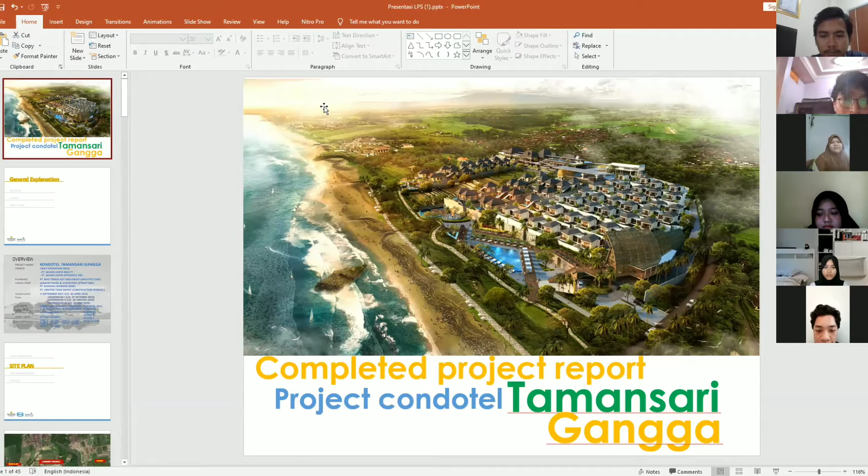Okay, Mrs. Arifiandani, this is our project report. The project is Tamansari Gangga. The overview name of the project is Condotel Tamansari Gangga, and the owner is a joint operation between PT Wijaya Karya Realty with PT Wijaya Karya Persero Tbk.

The planning consultant is PT Bias Tekno-Art Kreasindo as architecture consultant, Junaedi Masil and Associates as structure consultant, PT Narama Mandiri as MEP Mechanical Electrical Plumbing consultant, and PT Arkitek Team Empat as construction management. The construction time started on 9 September 2017.

Until 30 April 2019. First addendum until 27 October 2019, second addendum until 30 January 2020, and third addendum until 30 June 2020. The location is on Street Yeh Gangga, Sudimara, Tabanan, Bali, and the land area is 13,098.125 square meters with 5 floor levels.

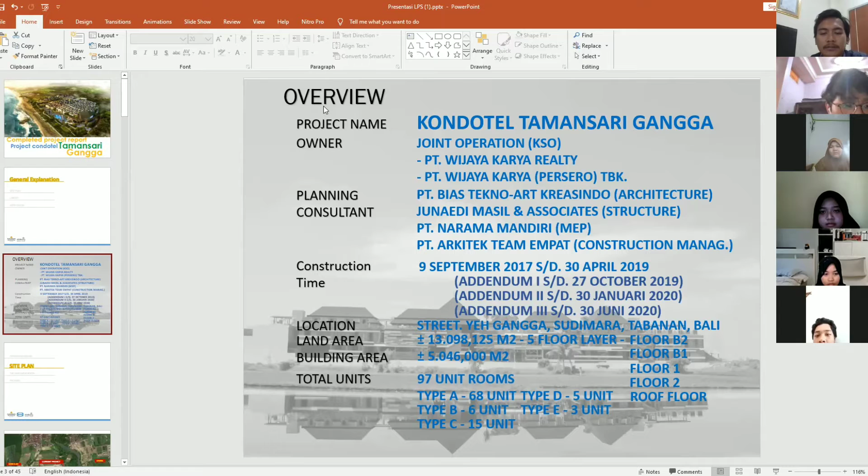Type C: 15 units. Type D: 5 units. Type E: 3 units. Next, the site plan.

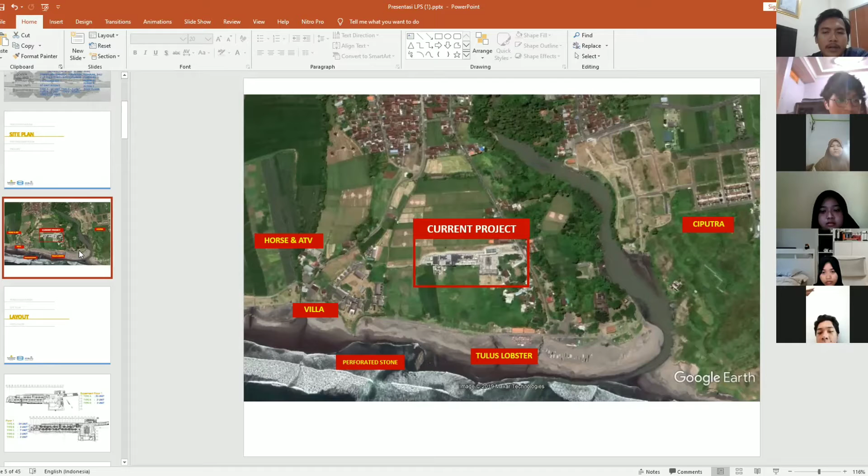This is the site plan of our project. The location is not far from Yeh Gangga Beach. This location is very strategic for the hospitality business in future development. Our plan is to create a beach club at the beach.

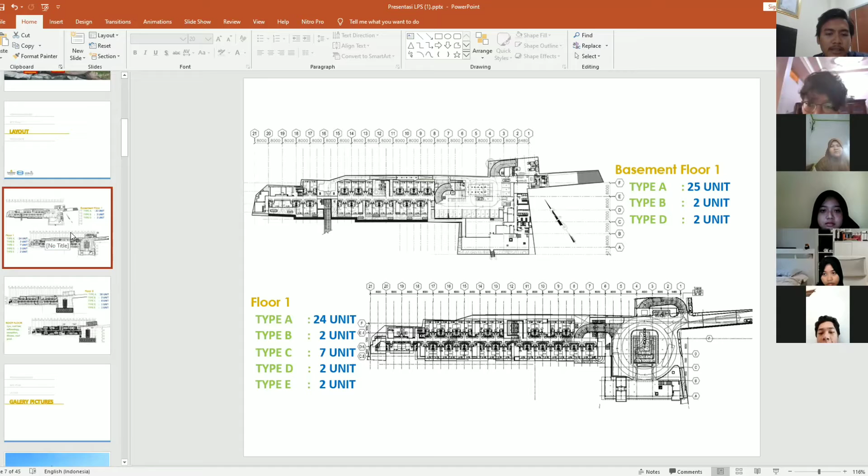This is our layout. There are 5 floors in this building. On basement floor 1, there are 25 units type A, 2 units type B, and 2 units type D. On the first floor, there are 24 units type A, 2 units type B, 7 units type C, 2 units type D, and 2 units type E.

On the second floor, there are 20 units type A, 2 units type B, 8 units type C, 1 unit type D, and 1 unit type E. On the rooftop floor, there is only public area, no rooms.

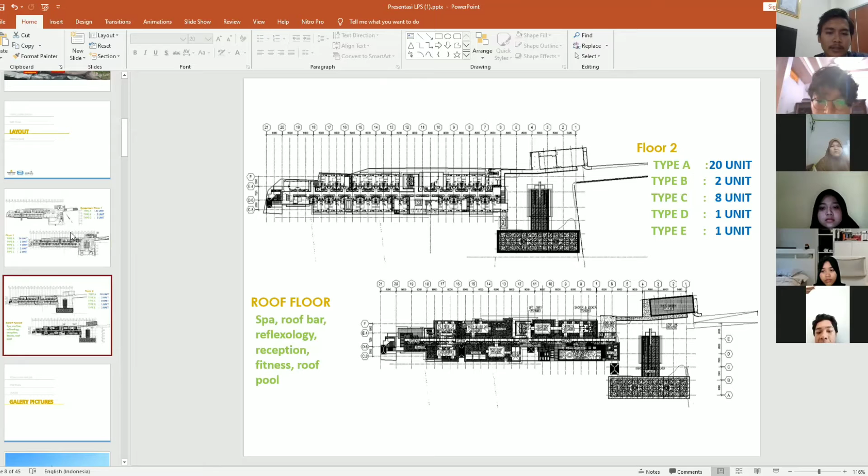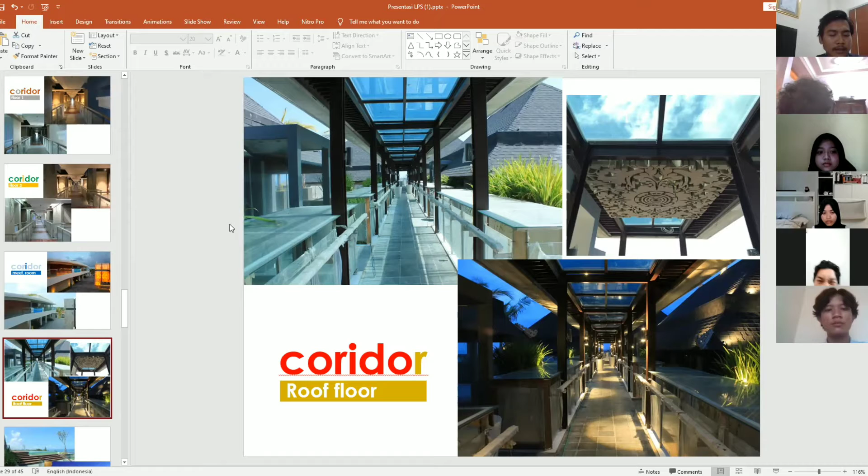Next, corridor. And this is our rooftop. These are the only public facilities, including spa rooms, reflexology, bar, retail, fitness, and pool. There is no room on the rooftop. This is a swimming pool, and this is a great point of view in this building—you can see the ocean. This is the roof bar, where visitors can feel the beauty of the beach while enjoying European style dishes.

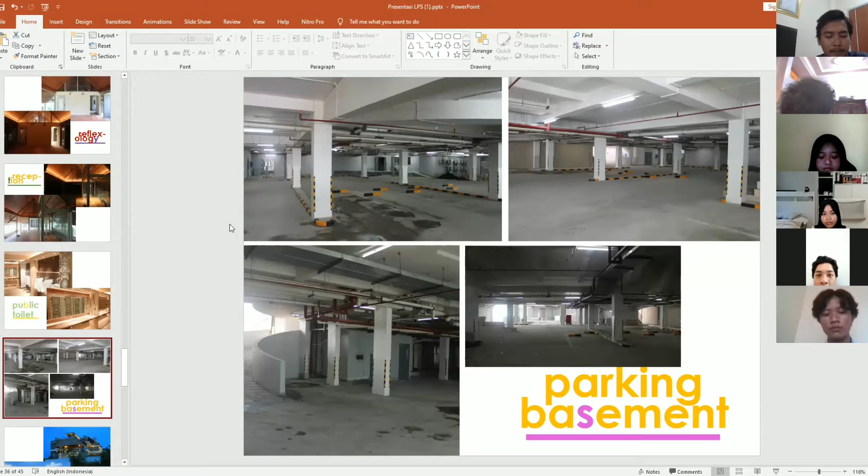And this is our parking. This parking lot can accommodate about 30 cars and 50 motorbikes. Bus vehicles can park in the drop-off area.

Okay, maybe that's enough explanation from my presentation. In essence, this project has reached 100% completion in the work items of structure, architecture, MEP, and landscape. Thank you.

Okay, thank you, Aldi, for the presentation. The readiness for the handover is quite good, but as noted, there is one work that has not been completed. What is the problem?

Then there is the submission of a work progress report by the main project implementer. Okay, thanks, Mr. Burhan. Here I will report the progress of the work that has been incomplete.

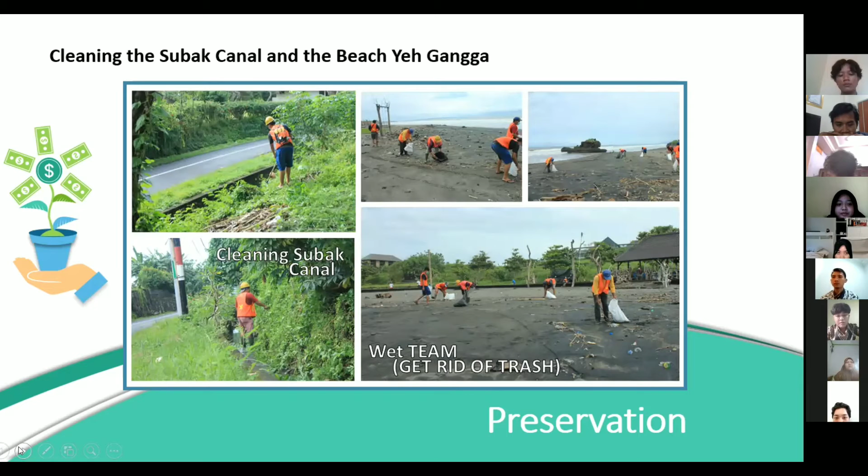Water saving: in reducing water usage, we only open the faucet when we need it, then close it after use.

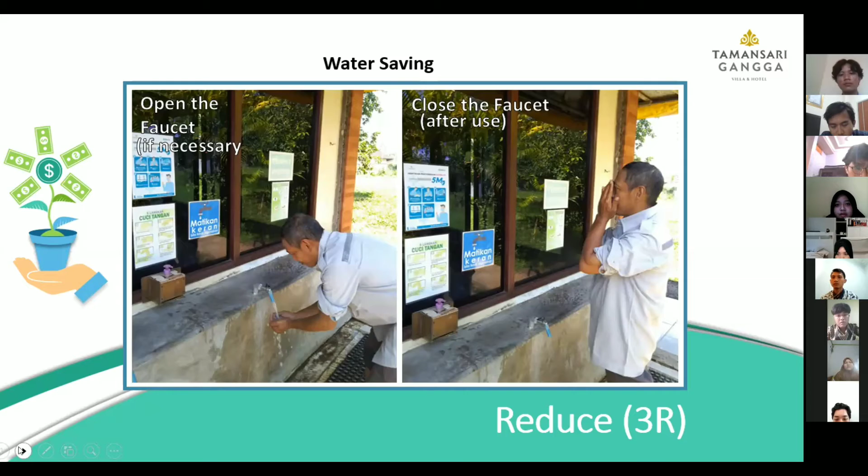Electricity saving: to save electricity, we remove the plug or charger once the battery is full. We turn the lamp on in the dark when needed, and turn it off during the day.

Reduce paper usage: we can reuse waste paper.

Reduce the use of plastic: we can use a bag to carry anything, which may reduce plastic usage.

Zero food waste: after having meals, we can give our leftovers to animals such as cats and dogs.

Reuse of waste paper: a lot of waste paper in the office can be reused to reduce paper usage.

Office material management, or reusable construction: we may reuse formwork waste material to make new tables and chairs.

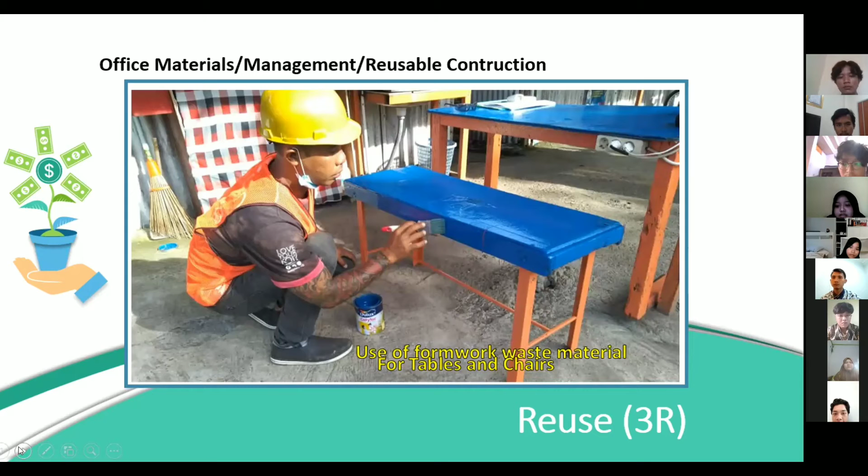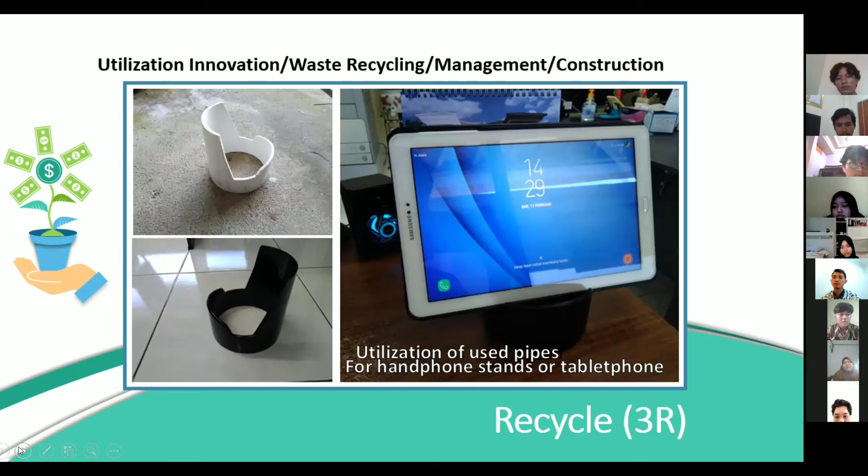Utilization innovation, or waste recycling and management in construction: making utilization innovations such as handphone stands from used items.

Environmental care campaign or promotion: letting people become aware of the environment by making an environmental care campaign or promotion and educating the local residents there.

Installation of environmentally friendly infographics: installing them in needed areas will make it easier for people to understand.

Environmental care banners, umbul-umbul, or baliho: these are used to let people become aware of the environment. Thank you.

Okay, thank you for the report. Then there is a presentation of the financial report by the Finance Division. The report will be submitted by me.

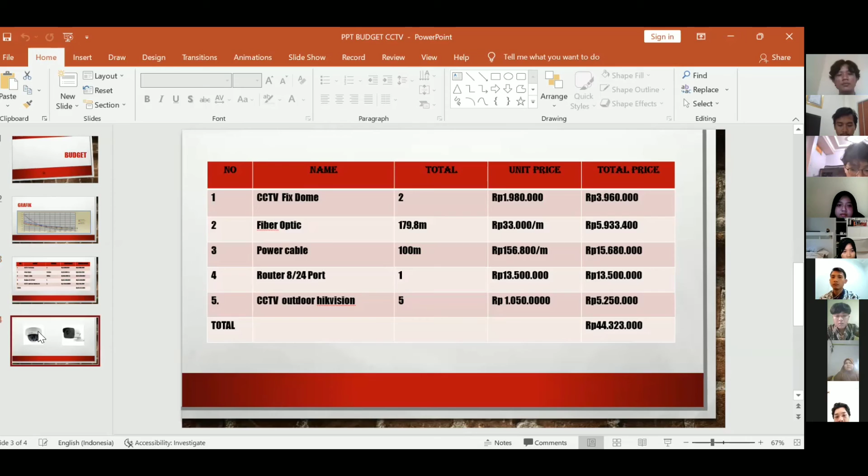Okay everyone, you can see this presentation. We installed 2 pieces of fixed CCTV, and this is the total price, along with fiber optic, power cable, router, and other CCTV Hikvision equipment, and this is the total price we will spend internally. So this is a picture of the CCTV we will use.

Okay, enough for my presentation. Thank you. Thank you. Okay, thank you for the report.

I cannot carry out the handover because the president director is visiting our project abroad this week, but I will try to finish it next week. And for all documents, please prepare well.

Your microphone is muted. Okay, sorry. Okay, I think that's enough for our meeting today. Before we close, let me convey the main points that we have got.

First, what I can conclude from the first presentation is that the construction time started from 9 September 2017 to 30 April 2019, and the project has been completed to 100%, but there is still something missing.